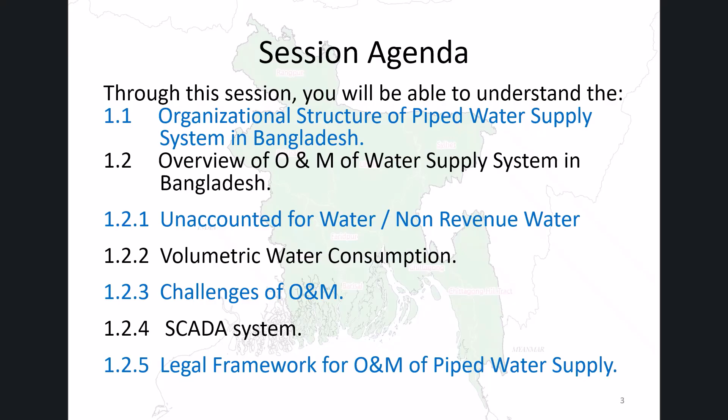This module covers Chapter 1 of the manual. The page numbers are from 1-1 to 1-14. Today we will learn about points on the operation and maintenance for the facilities in Pourashava piped water supply. Chapter 1 is the starting point of the entire training. It gives you the current state of water supply services in Bangladesh, the key issues with O&M, and the purpose and structure of this manual.

Let's begin with Section 1.1, the organizational structure of the piped water supply system in Bangladesh. In Bangladesh, drinking water in urban areas is primarily supplied through piped networks. However, not every urban town has a piped water supply system in place. Where piped systems do not exist, individual water supply options are provided instead. To understand who is responsible for what, it helps to know the scale of the urban water sector.

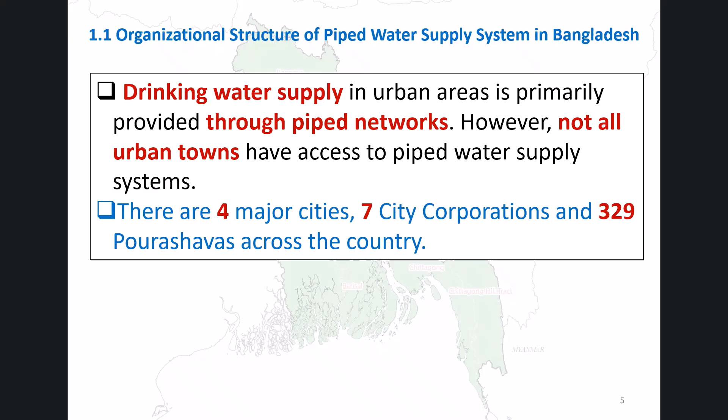Bangladesh has 4 major cities, 7 city corporations, and 329 Pourashavas across the country. The key question is, among all these urban areas, who builds the water systems, and who runs them? That is what the organizational structure explains. The organizational structure of piped water supply in Bangladesh is divided into 3 groups.

Group A, WASA areas in the 4 major cities, Dhaka, Chattogram, Khulna, and Rajshahi. Water supply is constructed, operated, and maintained by autonomous bodies called Water Supply and Sewerage Authorities, known as WASA. These organizations handle everything independently.

Group B, City Corporation areas. There are 7 city corporations in Bangladesh: Rangpur, Barishal, Mymensingh, Sylhet, Cumilla, Narayanganj, and Gazipur. DPHE generally establishes the water supply systems, and the city corporation is responsible for operation and maintenance. In some cases, the CC also expands the system by themselves.

Group C, Pourashavas at district and Upazila level. Of the 329 Pourashavas in Bangladesh, 247 have a piped water supply system that is either operational or under implementation as of 2024. In most cases, DPHE builds the system, and the Pourashava is responsible for operation and maintenance with technical support from DPHE. This manual is specifically designed to support DPHE officers who assist Pourashavas in Group C in carrying out effective O&M.

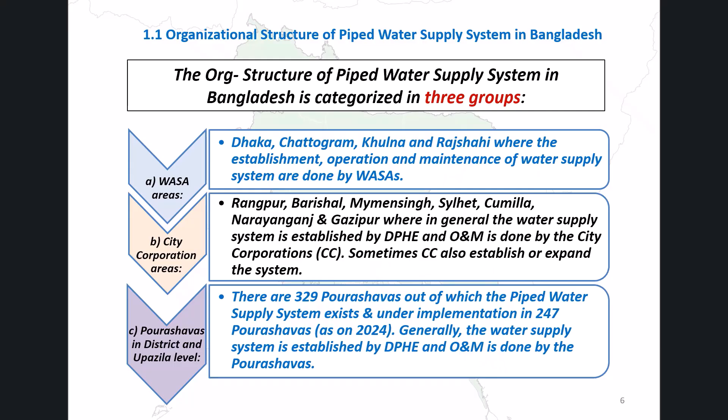Now let's look at an overview of O&M of water supply systems in Bangladesh. First, let's be clear about what O&M is meant to achieve. The primary objective of efficient O&M of a piped water supply system is to ensure the continuous supply of safe drinking water in adequate quantity and quality, sufficient pressure at convenient locations and times, while maintaining cost-effectiveness and long-term sustainability.

There are two key terms to understand here. Operation refers to the routine, day-to-day functioning of all components of the water supply system, including intakes, treatment plants, pumps, transmission lines, service reservoirs, and distribution networks. It involves daily monitoring and management by technical staff. Maintenance is the process of keeping all structures, equipment, and machinery in optimal working condition. It includes preventive maintenance, routine actions to prevent failure, and corrective maintenance, actions taken to fix unexpected failures.

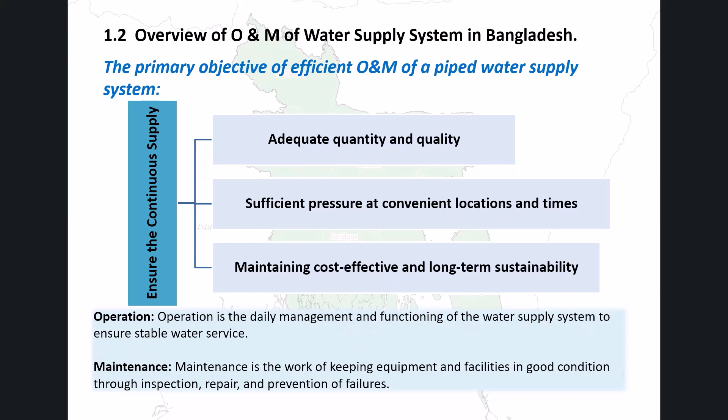Despite substantial investments in water supply infrastructure, inadequate O&M continues to undermine service delivery across many Pourashavas. Systems deteriorate faster than they should, lifespans are shortened, and premature replacements result in significant financial losses. The key issues identified as contributing to poor O&M are lack of finance, equipment, and material, inadequate data on operation and maintenance, inappropriate system design, and inadequate workmanship.

More than one agency with overlapping responsibilities, inadequate operating staff for O&M, illegal tapping of water, high NRW and unmetered connections, inadequate training of personnel, lesser attraction of maintenance jobs and career planning, lack of performance evaluation and regular monitoring, inadequate emphasis on preventive maintenance, lack of an O&M manual, lack of ownership and accountability, reluctance of assuring service by the municipal authority, and lack of real-time field information. These issues are interconnected, and addressing them requires a comprehensive, structured approach, which is exactly what this manual helps you with.

The draft of Sector Development Plan 2026 to 2040 describes the overall O&M situation in Bangladesh. Let's look at the key findings.

Challenge A. Periodic maintenance sometimes not done properly. Proper periodic maintenance requires regular inspection, leak detection and prompt repair, replacement of pipeline fittings and parts, flushing of pipelines, and regeneration of production wells. When this maintenance is neglected, systems deteriorate rapidly. In some cases, water supply systems have been abandoned within just a few years of completion because production wells stopped functioning and pipelines began to leak extensively.

Challenge B. Do not pay attention to disinfecting water. Water disinfection is sometimes neglected. In some areas, authorities are not applying bleaching powder or chlorine for disinfection, largely due to a shortage of skilled staff. This puts the health of consumers at serious risk.

Challenge C. Supply is mostly intermittent. In many Pourashavas, water is only supplied for a few hours a day. During non-supply hours, the pressure in the pipes drops. This low pressure allows contaminants to enter the system through leakage points, resulting in water contamination and health hazards.

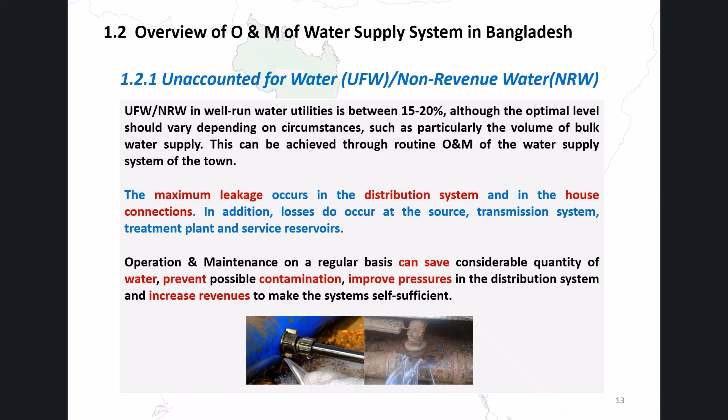Next, volumetric water consumption. The principle of volumetric water consumption is straightforward. It means tracking the exact volume of water that passes through a water meter. This is the foundation of effective water management.

To minimize UFW and NRW and maximize revenue, the ideal situation is to install water meters at all distribution and service connection points. The metering system provides two key benefits. First, it reduces wastage. When consumers know they are being charged for what they use, they use water more carefully. Second, it enables fair and economical pricing. The charges are based on actual consumption, making the system more equitable.

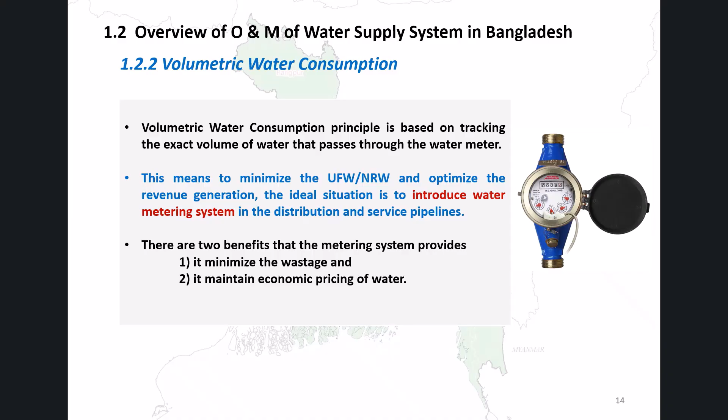In Bangladesh, domestic and bulk water meters have been installed in many major towns. However, over the years, most installed meters have become non-functional due to poor quality, mishandling, or tampering. When meters are not working, billing is often estimated on a flat rate basis, which removes any incentive for consumers to reduce usage. In such cases, electronic meters should be considered as a more durable alternative.

Next, challenges of O&M. The operation and maintenance of water supply systems involves a wide range of challenges. Three major categories stand out. First, aging infrastructure. Many water supply systems are old and require constant repairs to remain functional. The continuous need for maintenance on deteriorating infrastructure increases both costs and operational burden.

Second, availability of skilled personnel. Operating and maintaining complex water supply systems requires technical knowledge and practical skills. In many Pourashavas, trained and experienced staff are in short supply. Third, ownership, accountability, and financial sustainability. Clearly defining who is responsible for the system and holding them accountable remains a challenge. At the same time, without a stable revenue base, sustained investment in O&M is difficult.

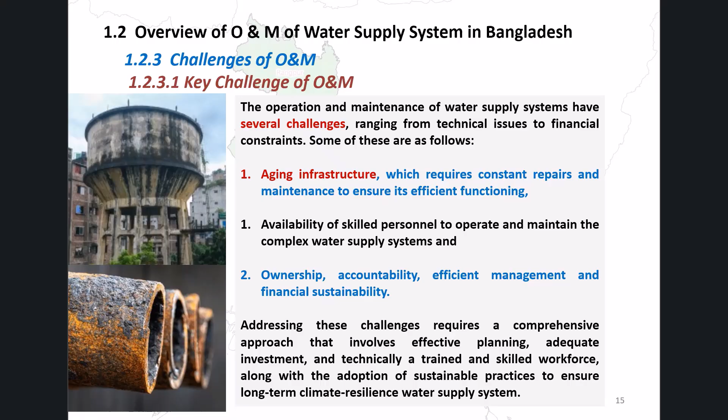Addressing these challenges requires a comprehensive approach: effective planning, adequate investment, a trained workforce, and the adoption of sustainable O&M practices to ensure long-term, climate-resilient service delivery. Climate change is adding a new and serious dimension to O&M challenges, particularly in Bangladesh. The key effects of climate change on water supply systems are written here.

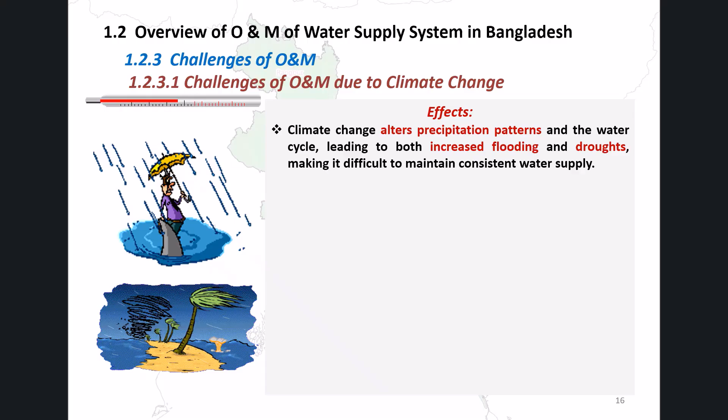Precipitation pattern changes. Both increased flooding and more frequent droughts make it difficult to maintain consistent water supply. Coastal erosion, increased salinity, and extreme weather events damage water infrastructure, requiring costly repairs and upgrades. Climate-related disruptions increase expenses for water treatment, energy consumption, and emergency repairs. Rising salinity, sedimentation, and pipeline corrosion accelerate deterioration of facilities and increase maintenance needs. Bangladesh's coastal Pourashavas are especially vulnerable as saltwater intrusion directly threatens groundwater sources and the integrity of distribution infrastructure.

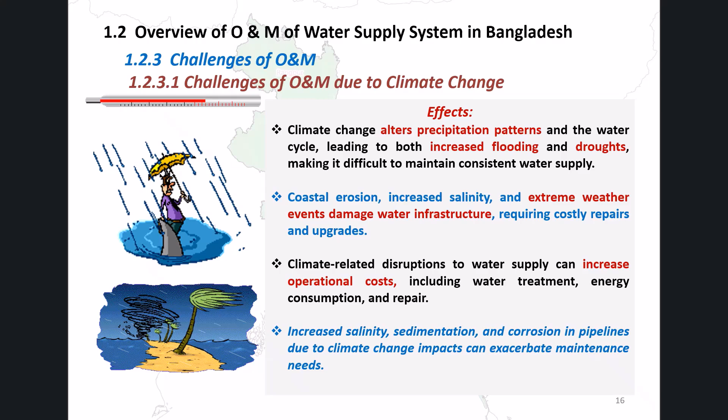To respond to climate change impacts, the following adaptation and resilience measures are required. Strengthen infrastructure. Reinforce pipelines, treatment plants, and pumping stations with climate-resilient designs capable of withstanding flooding and saltwater intrusion. Upgrade treatment technology. Implement water treatment processes to remove salinity and other contaminants to ensure safe drinking water. Diversify water sources. Explore alternatives such as rainwater harvesting and integrate them into the piped system after appropriate treatment.

Develop climate-responsive water management plans. These should address water allocation, storage, and distribution under changing climatic conditions. Raise community awareness. Educate communities about climate impacts and encourage responsible water use and conservation. Build financial resilience. Develop financial portfolios to fund adaptation investments, and prioritize the most effective resilience strategies.

Additionally, from a regulatory standpoint, the Department of Environment in Bangladesh classifies piped water supply projects as red category, requiring an environmental impact assessment or initial environmental examination. The environmental conservation rules must be followed. Refer to the DOE website at www.doe.gov.bd for details.

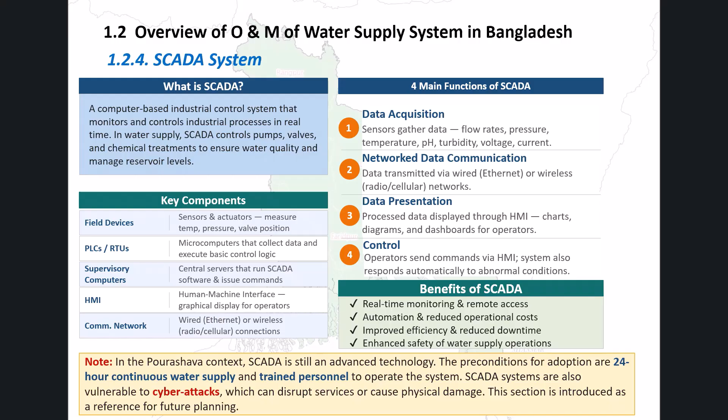While SCADA offers powerful capabilities, it is important to be realistic about its applicability in the current Pourashava setting. In Bangladesh, SCADA is still an advanced technology for Pourashava-level systems. Two preconditions must be met: 24-hour continuous water supply and trained personnel. And please note that SCADA systems are also vulnerable to cyber attacks. This section is therefore included as a reference for future planning, not for immediate implementation.

The Pourashava Water Supply Management Guidelines 2023 specifically state that water supply shall be operated and maintained by Pourashavas through consumer connections, tariff collection, legal enforcement for dues recovery, and disconnection where necessary. Pourashavas are also responsible for maintaining water quality and quantity to the satisfaction of consumers.

Except for the Pourashava Water Supply Management Guidelines 2023, all other water supply-related acts, policies, strategies, and plans are covered in Chapter 2, Part 1 of the Comprehensive Technical Guidelines for Rural and Pourashava Water Supply.

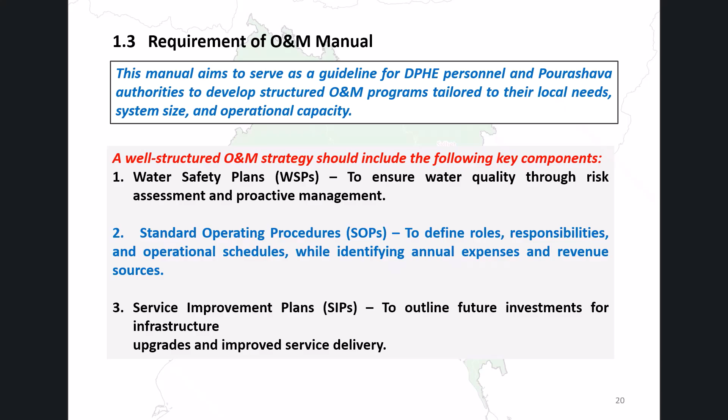This manual is designed to help DPHE officers and Pourashava authorities develop structured O&M programs that are tailored to their local conditions, system size, and operational capacity. Especially, standard operating procedures are essential tools for guiding local operators through their day-to-day O&M tasks. Good SOPs cover all major areas of the water supply system. Here, four main areas are explained.

Water sources. Proper management of groundwater and surface water intake systems to ensure reliable and safe source water. Conveyance and pumping. Regular operation, inspection, and maintenance of pumps and motors to ensure continuous flow throughout the system. Storage and treatment. Cleaning and disinfection of reservoirs, proper chlorination procedures, and management of filtration processes to maintain water quality.

Distribution systems. Leakage detection, pipeline inspection and repair, and management of household connections to minimize water losses and maintain service levels. Each of these SOP areas is covered in detail in the subsequent chapters of this manual, chapters 3 through 13. As a DPHE officer, you will use this manual to guide Pourashava in developing their own site-specific O&M action plans.

Beyond technical procedures, sustainable O&M also requires attention to the following important aspects. Financial planning. Pourashavas must maintain annual budgets that account for operating costs, revenue collection targets, and financial sustainability. Effective billing and revenue management are critical. Without a sound financial base, even the best O&M plans cannot be sustained.

Capacity building. Many local operators have limited technical skills and experience. Hands-on training, troubleshooting support, and continuous skill development must be provided. Without proper training, routine maintenance becomes inconsistent, leading to equipment failure, service disruptions, and higher costs.

Community involvement. The community plays an important role in protecting water sources and the distribution system. Ward-level consumer forums can monitor sources, report potential contamination, and provide feedback to Pourashava for timely action.

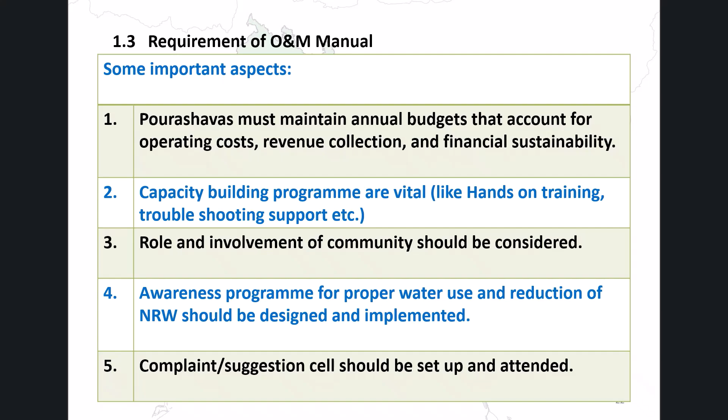Awareness programs on water conservation, hygiene, and water quality should be designed and implemented with the involvement of these forums. Complaint and feedback management. Pourashavas should establish complaint and suggestion systems so that consumers can report issues such as leakages, low pressure, or water quality concerns. All complaints must be addressed within a reasonable timeframe to maintain public trust and service quality.

Then, how can you use this support manual? This manual is generic material; it is not designed for any specific city corporation or Pourashava. Instead, it provides a universal technical framework that any service provider can use as the basis for developing their own O&M action plan. Following this manual, DPHE will train relevant personnel from city corporations and Pourashavas to prepare site-specific O&M action plans and carry out regular O&M activities.

Key features of the manual include: each topic covers the outline of basic theory as well as confirmation points and control measures, explained in detail. Strong emphasis on visual explanation: sketches, diagrams, and photographs are used throughout to ease understanding. Content is structured to be practical and directly applicable in the field. The following chapters cover the full range of water supply components and management topics.

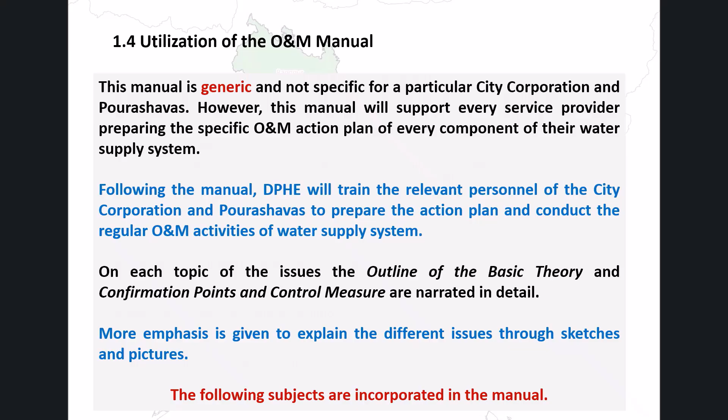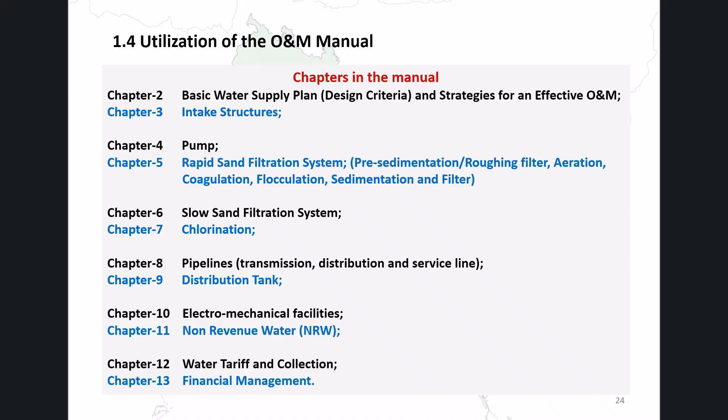As a DPHE officer, focus on the chapters most relevant to the type of water supply system in the Pourashava you are supporting. The modular structure allows you to refer to individual chapters as needed. From now, the structure of each chapter is explained. One of the strengths of this manual is its consistent format across all chapters. Every chapter covering a water supply facility follows the same structure, so readers can quickly find the information they need.

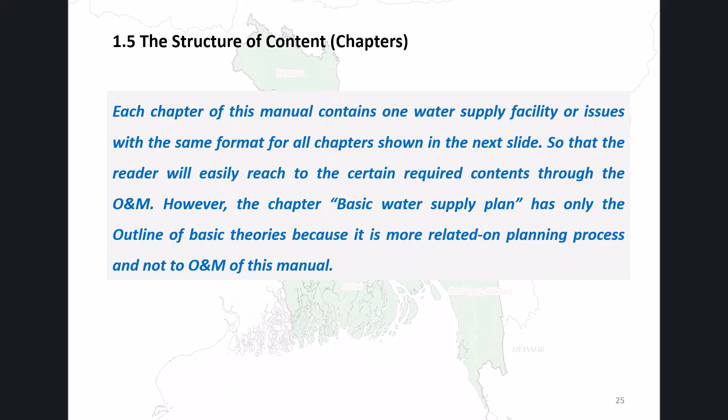The only exception is Chapter 2, Basic Water Supply Plan, which deals primarily with planning rather than O&M operations. As a result, that chapter contains only the outline of basic theories, without the diagnostic and troubleshooting sections found in other chapters. The next slide shows a diagram of the standard chapter structure. Let's walk through the standard chapter format shown in this diagram. In each chapter, the head numbering starts with the chapter number. So, in this diagram, X is the chapter number.

X.1 Outline of Basic Theories. This section provides the foundational knowledge that DPHE officers need to support Pourashava on O&M. It covers technical terms, equipment functions, system principles, and key formulas. This is the minimum knowledge required to understand and guide the facility. X.2 Confirmation Points and Control Measures. This section is divided into two parts. X.2.1 Operational Aspect describes what to check during normal operations.

X.2.2 Diagnosis guides the reader through how to assess the condition of a facility using required data, confirmation points, and recommended actions. Each diagnostic item is structured around risk, necessary data, confirmation point, action, and countermeasure. X.3 Troubleshooting. This section summarizes the content from X.2.1 in a table format, organized by phenomenon, cause, risk, and countermeasure. It helps operators quickly identify problems and find solutions.

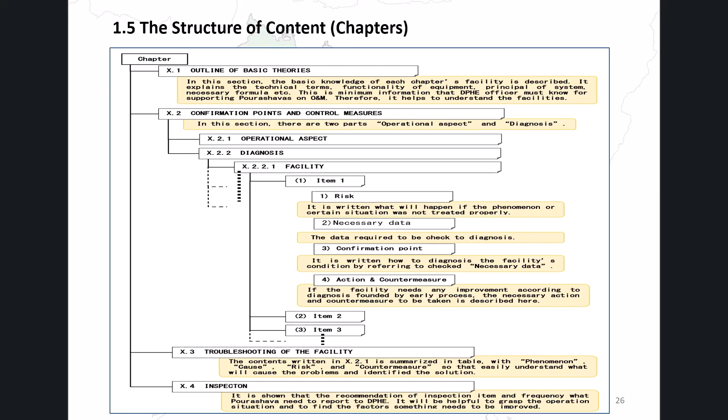X.4 Inspection. This section provides recommended inspection items and frequencies for Pourashava to report to DPHE. Regular reporting helps DPHE identify trends and provide timely technical guidance. For DPHE to provide meaningful O&M support, the starting point is understanding the current situation in each Pourashava. This requires systematic collection of operational information, including functional status of water supply facilities, population being served, hours of water supply operation, incident and breakdown reports, and facility operation records. Without this data, it is impossible to plan or implement effective O&M.

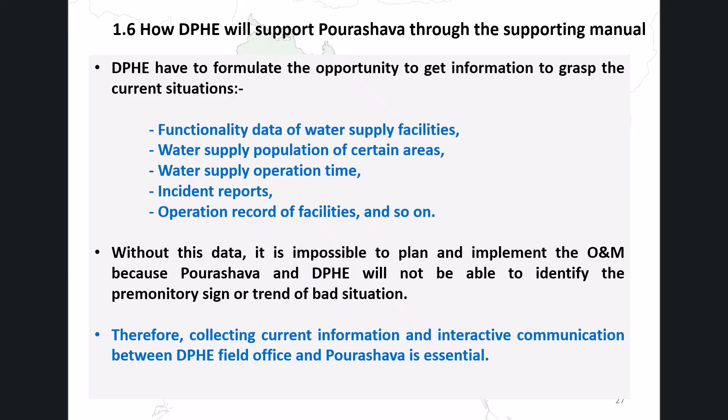If DPHE and Pourashava do not have current, reliable information, they cannot identify warning signs or deteriorating trends before problems escalate. This is why continuous information collection and interactive communication between DPHE field offices and Pourashava are essential. One practical channel for this communication is the WATSAN Committee, which stands for Water and Sanitation Committee. It is already operating in many areas and can serve as a regular forum for sharing operational data and concerns. DPHE's role goes beyond giving technical advice on a case-by-case basis. The goal is to build the long-term capacity of Pourashava so that they can manage their systems independently and sustainably.

This brings us to the end of Chapter 1, Introduction. In the chapters that follow, we will go deeper into the specific O&M requirements of each component of the water supply system, from intake structures and pumps to pipelines, distribution tanks, and financial management.